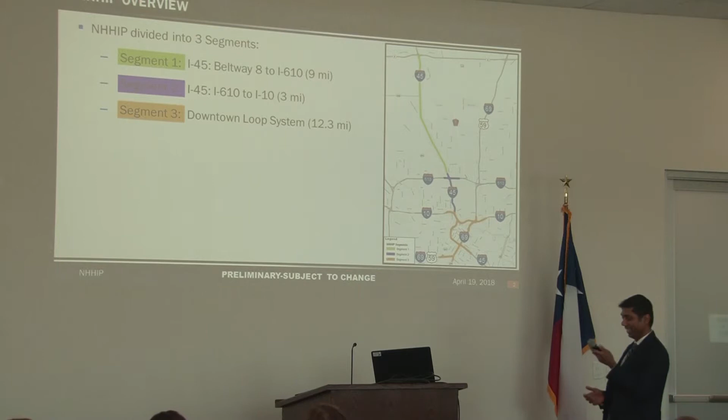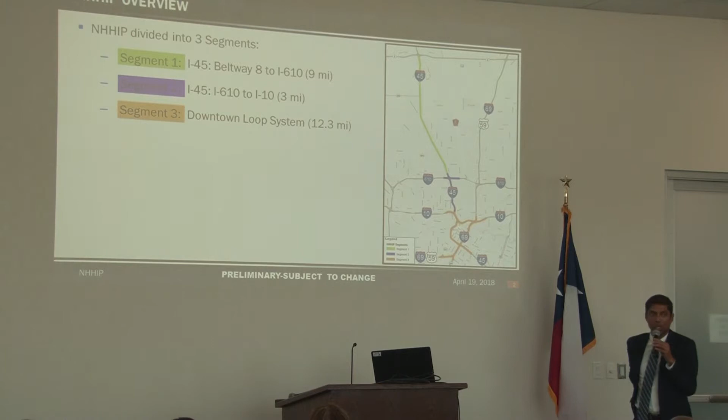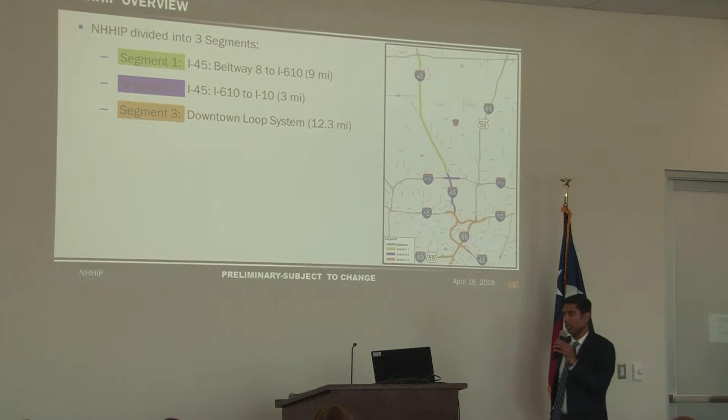So NHHIP has 3 segments. We're going to start up north and head south. Segment 1 is along 45 from Beltway 8 to 610, roughly 9 miles. Segment 2 is from 610 south to I-10, approximately 3 miles. Segment 3, we're calling the downtown loop system, which includes 45, I-10, 69, and where 288 terminates coming up from Pearland, just south of downtown, Midtown area.

The goal of this initiative is to provide a safer facility with additional capacity for projected demand by incorporating transit opportunities, travel demand strategies, and flexible operations. One proposed recommended alternative per segment equals a corridor end-to-end with approximately 24 miles. You can see the map with the different segments color-coded, segments 1, 2, and 3.

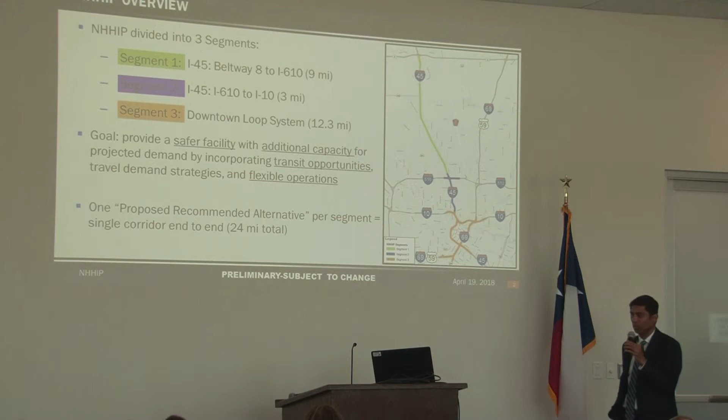The need for the project is due to population and employment increases, to manage projected traffic growth, bring the facility up to current and safety design standards, and move traffic efficiently, including evacuation events.

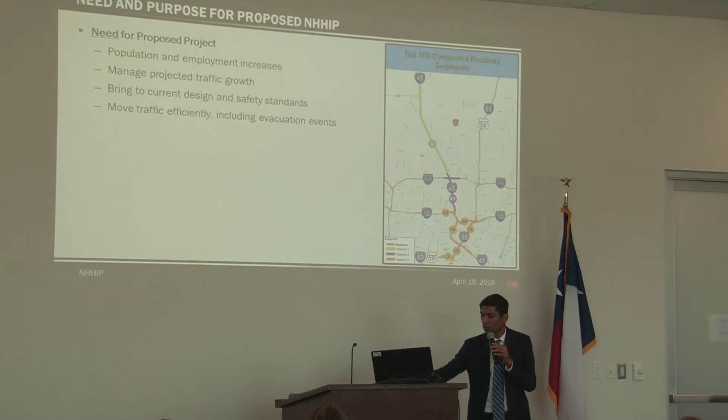The purpose of the project is to manage congestion, enhance safety, provide expanded transit and carpool opportunities with a 2-way 24-hour operation. Today you have a reversible facility for parts of 45 that we want to go concurrent with the proposed project. And finally, improve mobility and operational efficiencies.

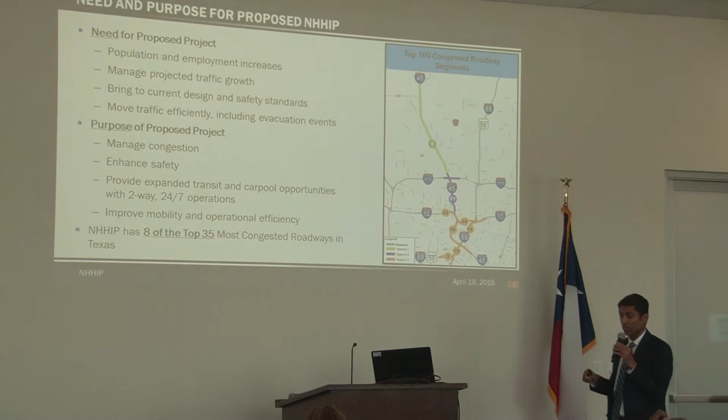I believe it was referenced earlier, maybe in Quincy's slides, that the Texas A&M Transportation Institute every year provides the top 100 most congested roads in Texas. This project, from Beltway 8 down to downtown, the downtown loop system, has 8 segments within the top 35 of that most congested roads in Texas. So definitely, we have a need and a purpose for the proposed improvements.

Today, I want to focus in on segment 3. Classic TxDOT, we start and we're going to deliver 3 before 1 before 2. So bear with us. Segment 3, as mentioned earlier, is approximately 12 miles.

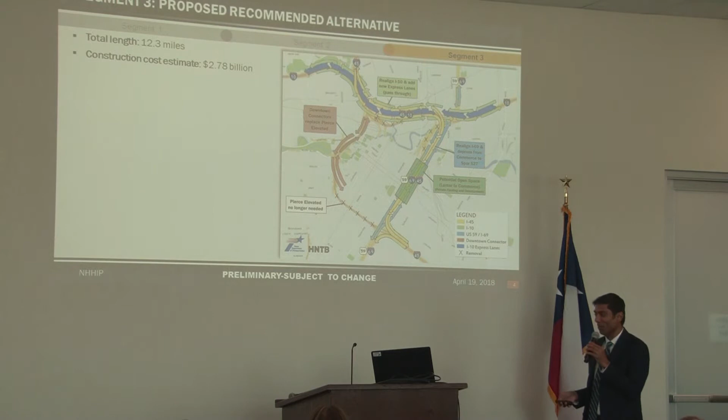The construction cost estimate only does not include design or any engineering and construction testing, materials testing, but just construction is $2.78 billion. I saw some eyes and eyebrows reach for the ceiling over here. It's a big initiative, and you'll see why.

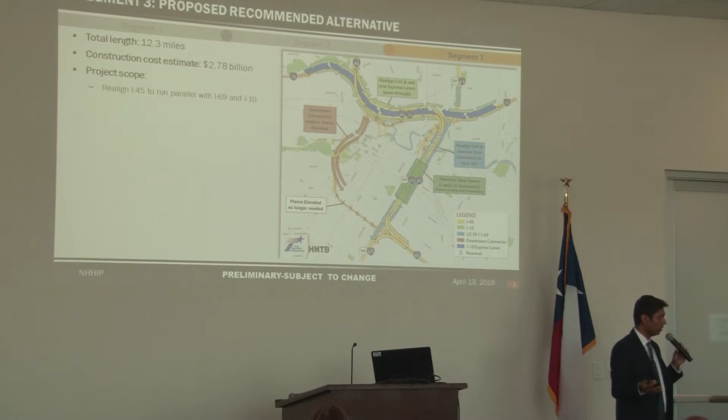The project scope, and this is sort of the big reveal for this project for those not familiar with it: we are proposing to realign I-45, which currently runs on the west side of downtown, partly on the Pierce Elevated before it goes down to Galveston. We're looking to realign it along I-10 on the north end and along the east side of downtown parallel to 69, and then turning again to go in its current alignment down to Galveston.

We're going to decommission the Pierce Elevated and construct downtown connectors that provide a connection between I-10 and I-45 to maintain that connection into downtown on the west side.

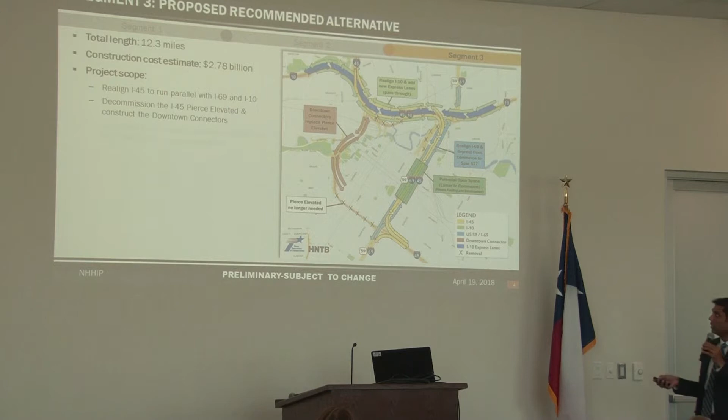We're going to reconstruct I-10 and add new non-toll express lanes, that's the blue up top, running left and right through downtown. This is to get throughput through downtown. Limited ability to enter those express lanes and leave them. It's all about throughput.

Another big component of this project is depressing I-69 Southwest Freeway from Spur 527, which is off the page, to Commerce Street, just below, before Buffalo Bayou. Reconstruct 288 from I-69 and I-45. Essentially, that is where 288 is parallel with 59 today through Midtown.

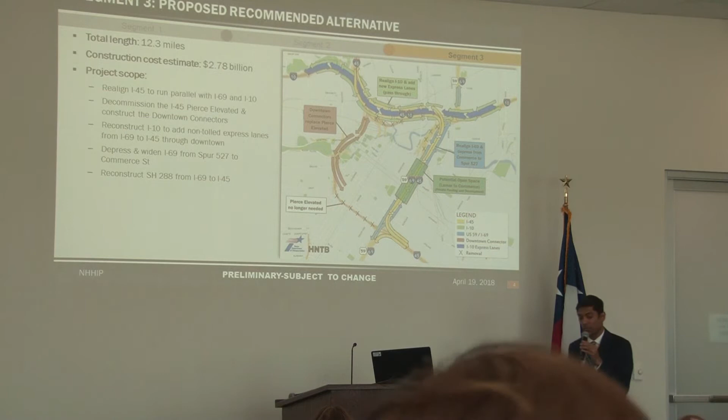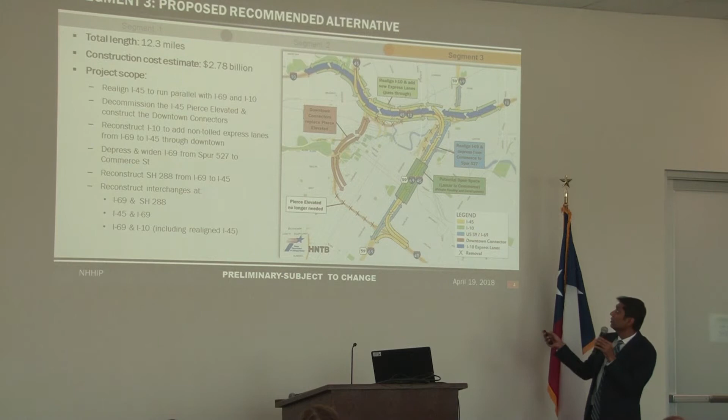With all this work, as you can see, it involves reconstructing major interchanges: I-69 and 288, 45 and 69, right here, I-10, 69 and 10. Now with the realignment of 45, you have to accommodate 45 through that interchange, right? And finally, I-45 and I-10.

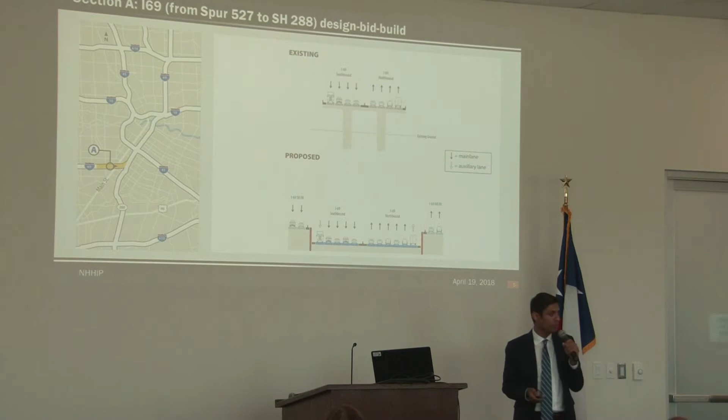So you saw the plan view, kind of the map of the project. I want to show you some typical sections for each of these sub-areas within the project. This section, Section A, is from Spur 527 to 288. You see up there design, bid, build. So that is going to be designed in-house by TxDOT engineers and put out to let for a low bid.

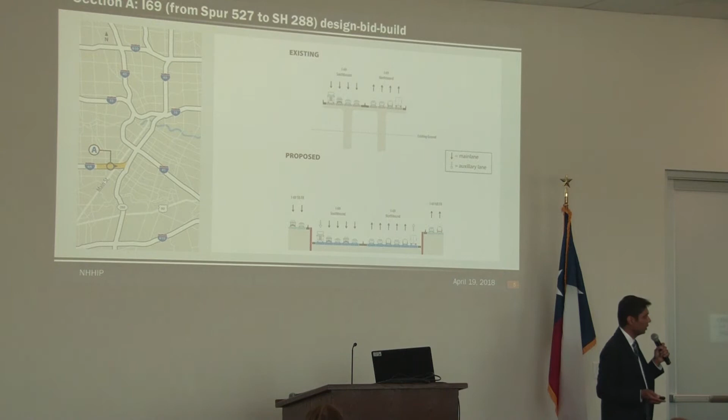So this is quiz time. Is that considered alternative delivery or traditional delivery? All right, good job. This project is projected to let to construction in FY 2020 by TxDOT.

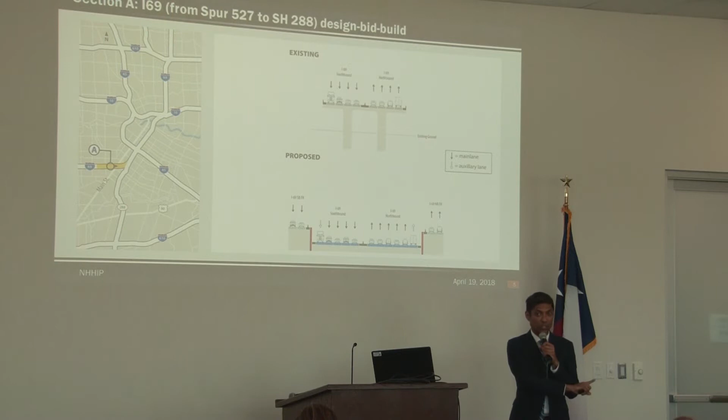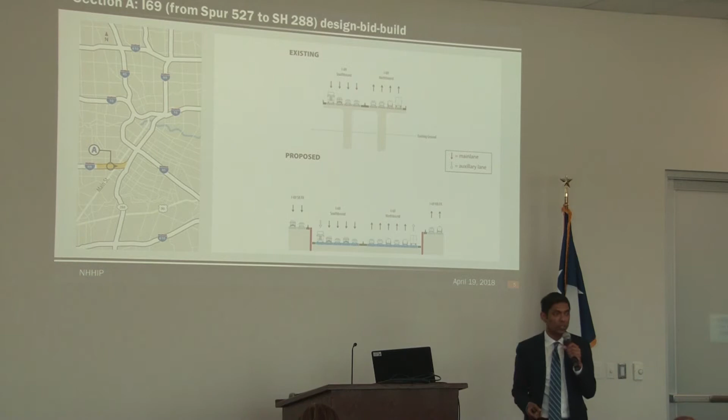Today, 69 is elevated on structures. You've come under the arch bridges through Montrose, and now you're up on structures in this section after 527. With the proposed improvement, we're going to lower 69 to match what's to the west with the arch bridges. 69 will be depressed, we're adding capacity, and introducing auxiliary lanes to allow local traffic entering and leaving the freeway to reduce side merges. We like a laminar flow, not turbulent flow, so the auxiliary lanes allow us to do that. We're also introducing a frontage road system that doesn't exist today for local circulation.

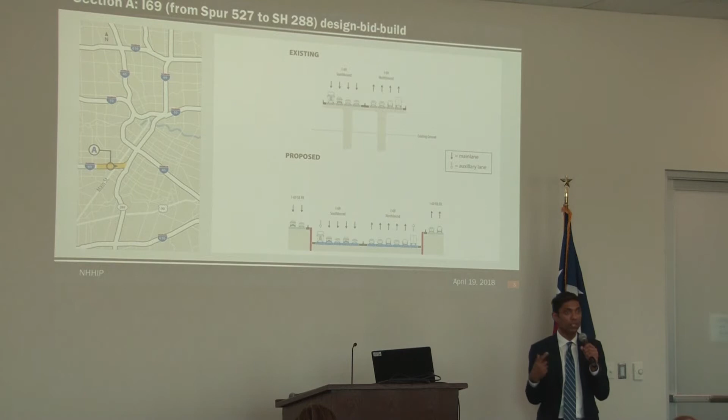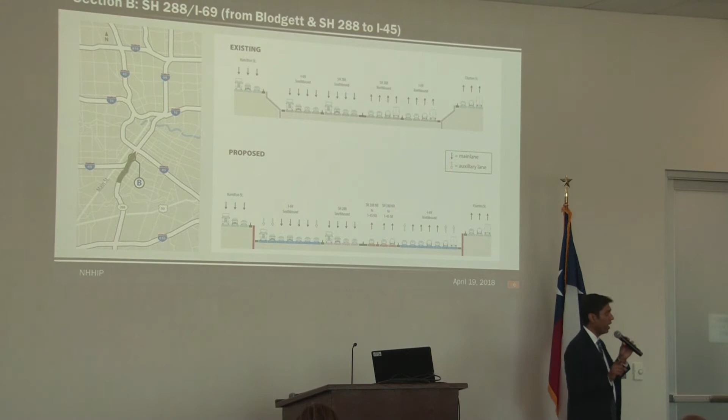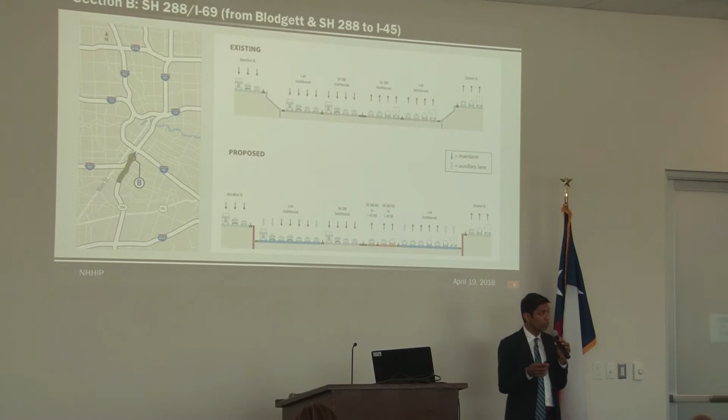Section B. Today, 69 and 288 are parallel with each other. In the proposed project, they will continue to be parallel. However, we make the decision point for folks coming up from 288 earlier than today, whether they want to go to 45 north or south, or to 69. Once you make your decision, it's barrier separated.

Section C, I-69. This is essentially behind the convention center, Minute Maid Park, and the soccer stadium. Today 69 is up on structure. If you're going south on 69, you can see the convention center really close, you can almost touch it. With the proposed project, we're looking to depress I-69. This is also the first time you'll see I-45 in its new alignment, in the middle of 69. We're going below grade, and the local cross streets that currently go under the 69 bridges will actually be open, at grade, above ground, while the highway is below.

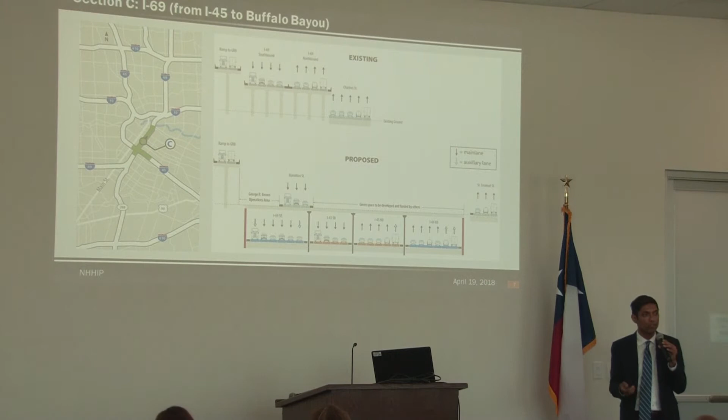We've got an animation that I'll show you, and I want to touch on a feature you'll see. With depressing the highway, you've got an opportunity now with a deck for a third party to fund a deck park. We're having those conversations right now with the city and other folks downtown who are interested in partnering with TxDOT for that work.

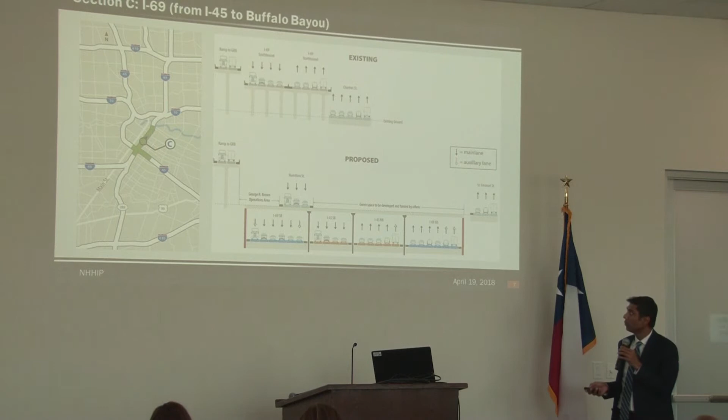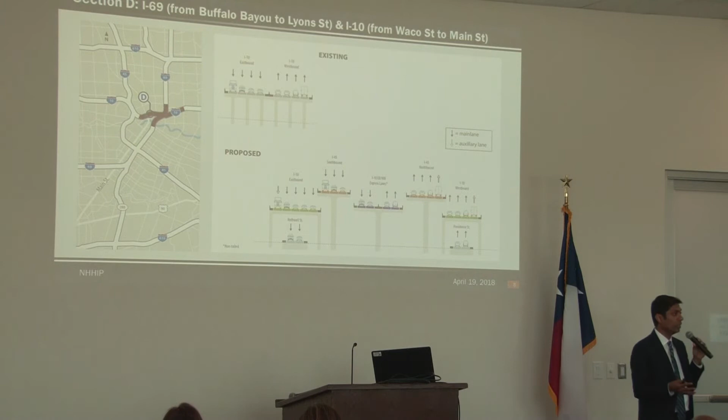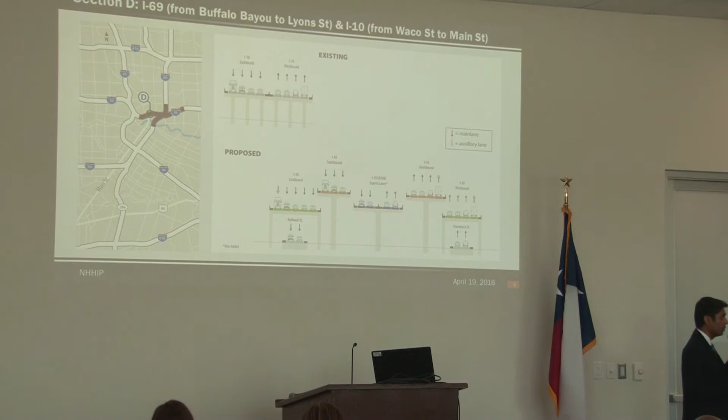Section D is essentially along I-10. Once again, you see I-10, and I-45 now has been realigned to be parallel with I-10. You also see the new feature of the I-10 non-tolled express lanes. The regular I-10 lanes, in green, allow interaction with local streets via entrance and exit ramps, but the express lanes of I-10 are more about throughput, getting folks through downtown with minimal entrances and exits. And of course, you see the I-45 structure.

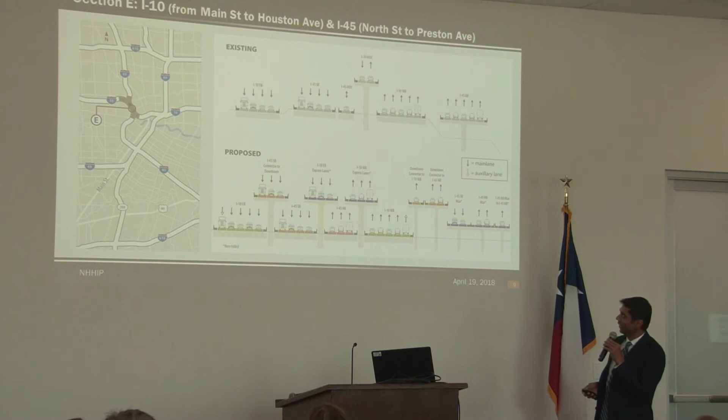Section E. It's a lot of work there, so just take your time, we'll work left to right. Why don't we understand where we are today? Today we've got I-10 and I-45 coexisting with the I-10 HOV.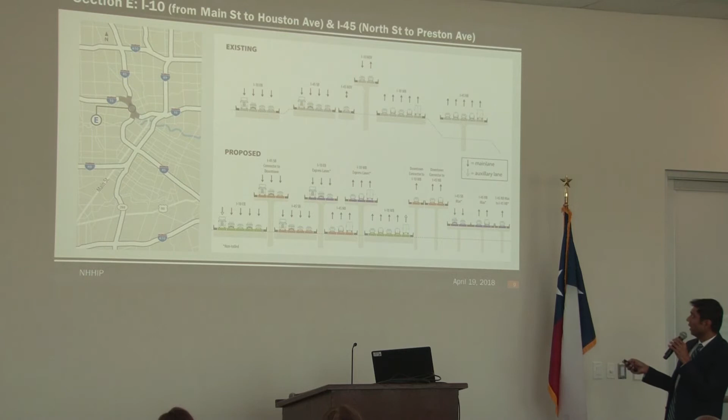Tomorrow you will continue to have I-10 regular lanes, general purpose lanes, and you'll have the express lanes. You have I-45. Because we're realigning 45 and decommissioning 45 on the west side of town, we still want to provide connectivity on the west side of downtown, and that's what these downtown connectors provide, accessing both downtown via I-10 and I-45.

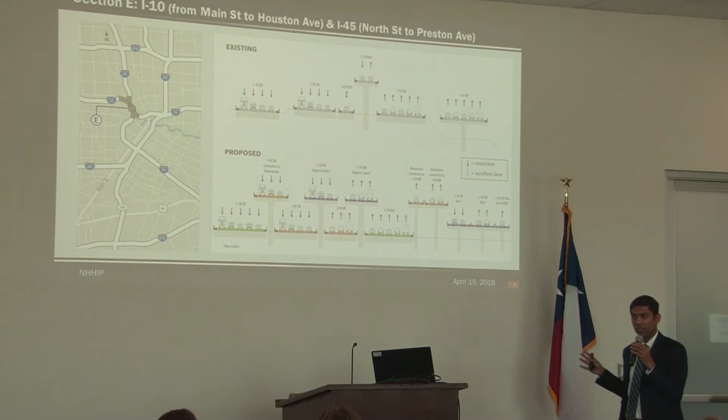This is a new element to the slides, the I-45 max lanes, non-tolled. The distinction between the max lanes of I-45 and the I-10 express lanes is that the I-10 express lanes will not have an occupancy criteria like HOV, anyone, single or multiple occupancy, can get in those lanes, whereas 45 max lanes will have that restriction. You may have to have at least 2 people in the car to use those lanes. Transit will be able to use those lanes. So it's a little more restrictive, and we're calling it max lanes.

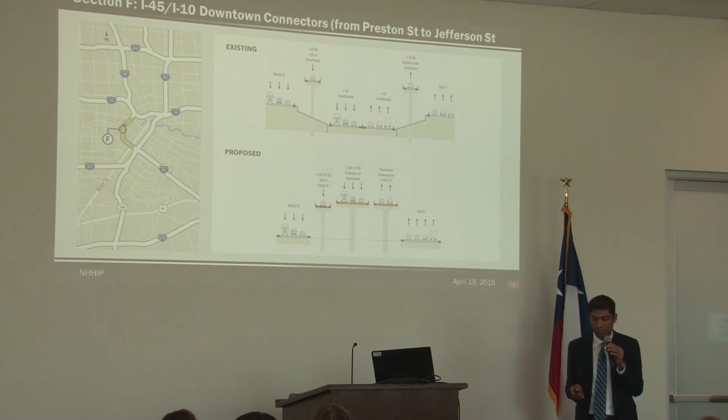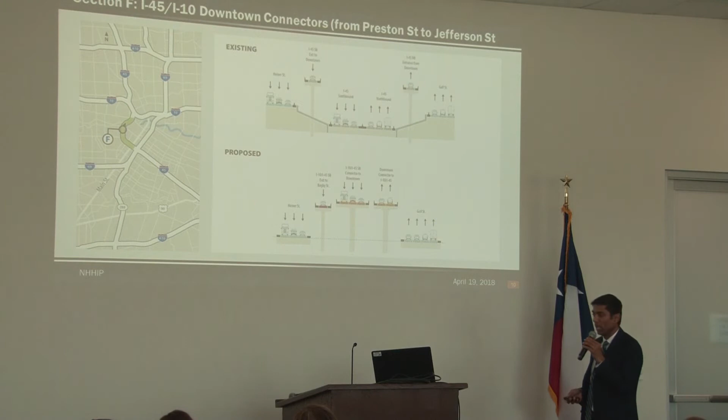The final section I'll share with you is the downtown connectors. Today you've got 45 on the west side of downtown, also carried on the Pierce Elevated. As we talked about earlier, 45 is going to be realigned, and what's left with the proposed project is the downtown connectors, picking up local traffic in and out of downtown and getting them to I-10 and I-45.

The next slide, I believe, is the animation. Is there any questions right now before we get into that?

Question about the private design build where there's a tollway afterwards. When are these tolls going to be released to TxDOT? I mean, when is it going to be released to TxDOT so that the public doesn't get stuck with the ever tollway? TxDOT needs some relief to get some of that money back.

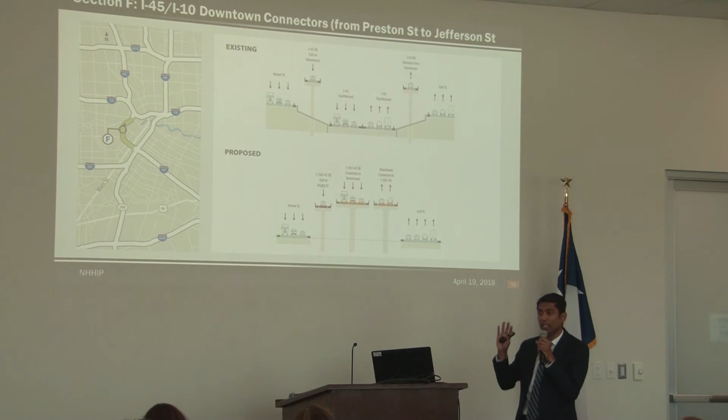So this project does not have a toll element, I want to be very clear about that. The I-10 express lanes are non-tolled, the I-45 max lanes are non-tolled. The 288 project is being constructed right now in Harris County. It's a version of design build called concession, a long-term agreement that TxDOT is entering into with our developer, the concessionaire. I talked about it earlier. The cost of construction and design is $815 million. TxDOT is only putting in 17 of that. The private developer has brought their own equity, secured their own loan with the federal government through a TIFIA loan, and they've already sold their own bonds. TxDOT has no risk with that debt.

If, when they open that facility, toll collections reach a certain level, our contract with them has provisions that they provide a share of those revenues. To answer your question, that agreement per law cannot last more than 52 years. So the facility at that point would turn back to TxDOT.

Is the connector road to downtown going to be built first, in terms of traffic control? That's a very good question. As you can see, for the downtown segment 3 work, traffic control is going to be a big part of the design build effort, and the teams we procure or advertise to will have to speak to that with their concepts and plans for keeping traffic flowing.

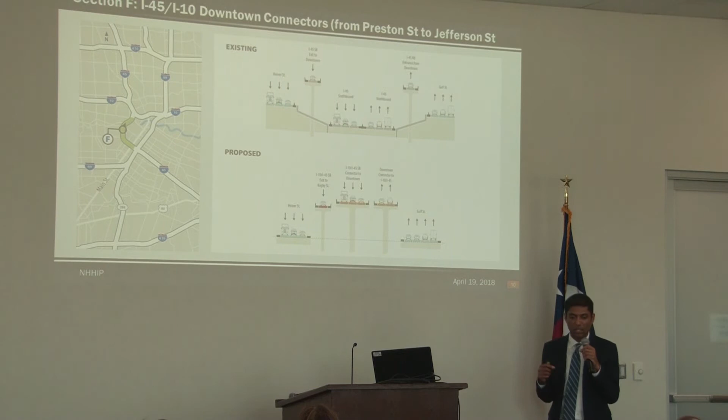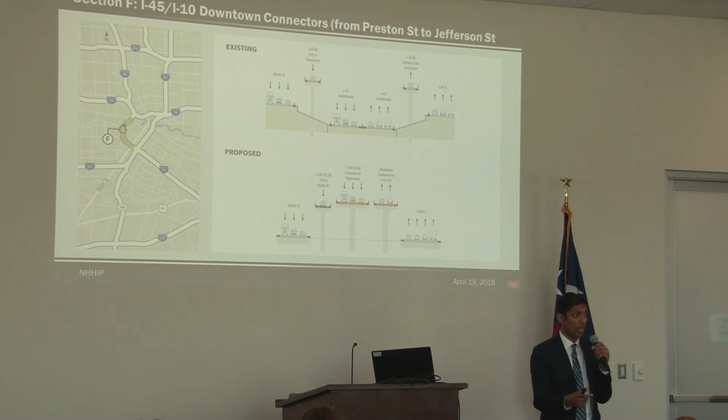At this point we have not come up with a sequence of construction, and that's why we're using design build. Unlike a traditional project where we design the sequence for the contractor, we want to see those ideas, taking advantage of the contractor teaming up with their designer. We'll have prescriptions that we need X number of lanes on I-69, I-10, and 45 to remain open and flowing, but how they phase it, we want industry to come up with those ideas.

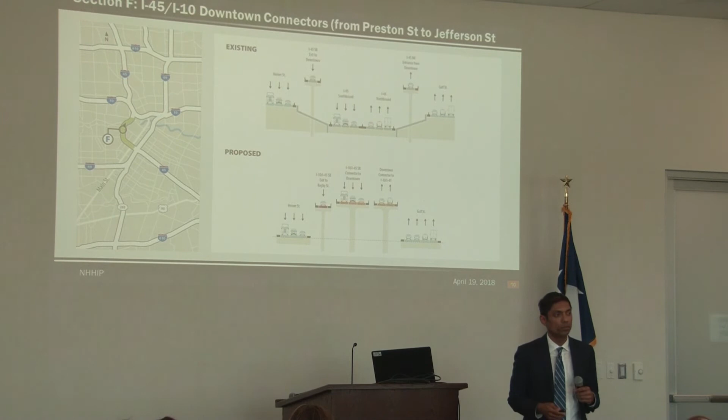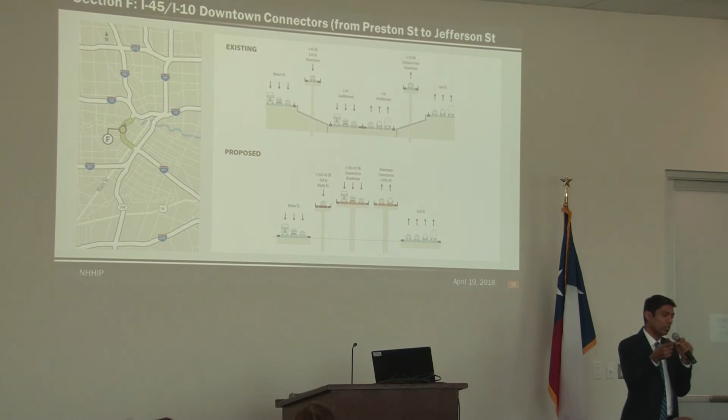I see that the proposed alignment, most of the sections are depressed. Are they going to be above the 100-year floodplain? We are currently, and it's in a future slide, designing the interstate system to a 100-year standard. We're engaged with advancing the preliminary design supporting the environmental schematic to the next level to help us write the specs for the design build procurement.

Where we can do better than 100-year, we're committed to doing that, just because it's Houston and we're coming off of Harvey. Aside from lowering the freeway, drainage is a high-risk item in this region, and since we're lowering the freeway, we're paying particular close attention to that element. That's why we've engaged our providers to help tighten the specs before we go out to the design build community.

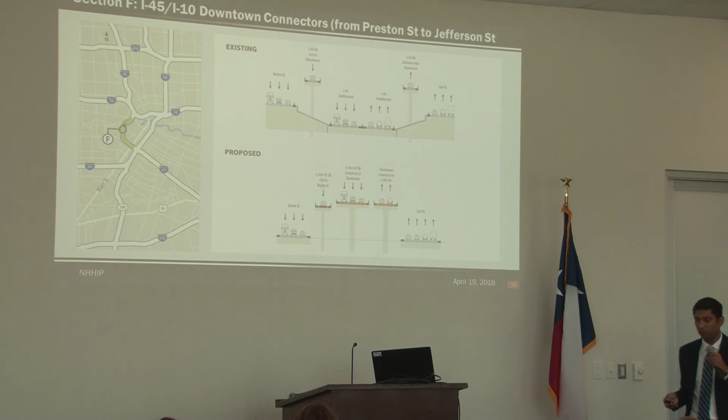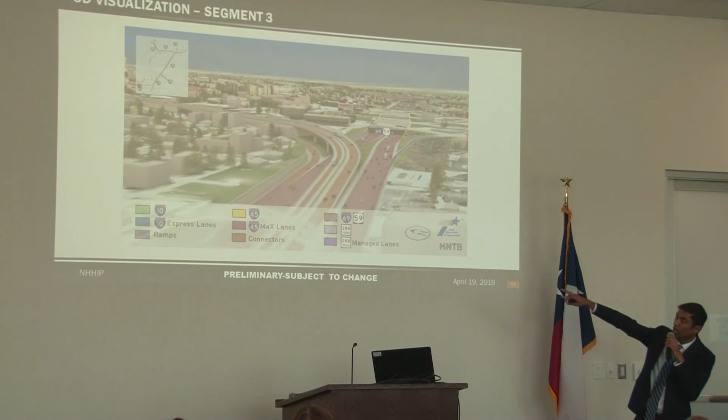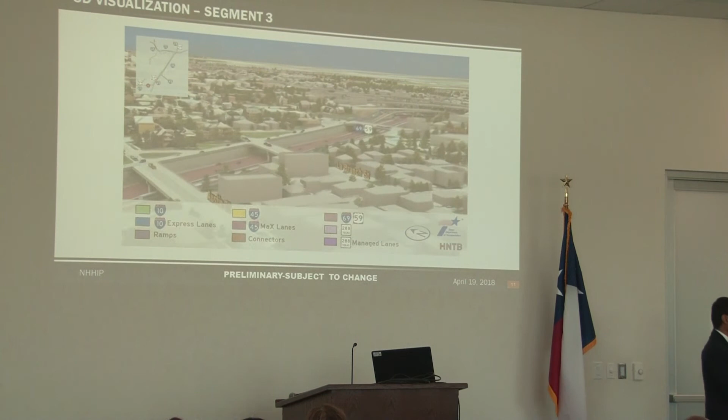All right, so let's do the animation, focused on segment 3. We'll start with the end of the project, 69 from Spur 527 going off to the left. This is where 69 is depressing now, currently on structure. This is another opportunity for a third party to partner with TxDOT to fund and construct a deck park. As Quincy is fond of saying, partnership means come to us with some dollars, so I want to make sure I share that message.

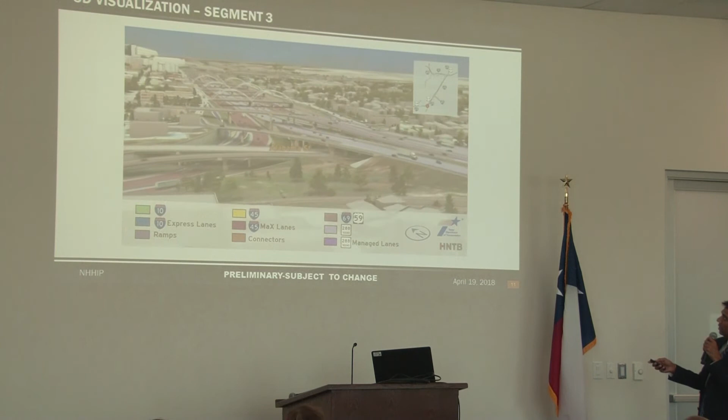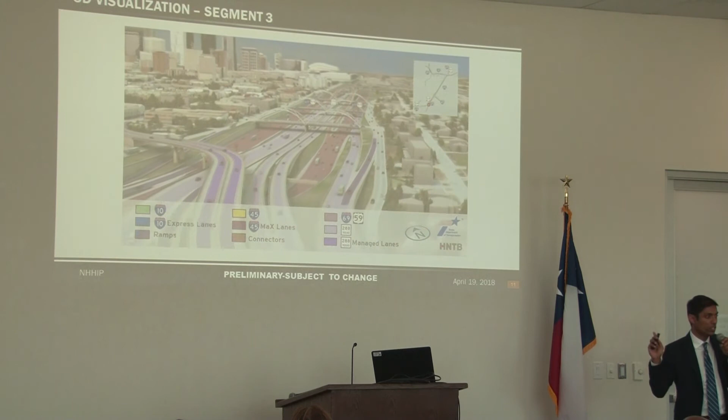Now we are turning to where 288 and 69 are side by side, and we are looking to carry the theme of the arch bridges in this section. Elgin, McGowen, and Tuam are the three bridges you see we'll be rebuilding. And we're going to approach I-45 as it goes to the right to Galveston.

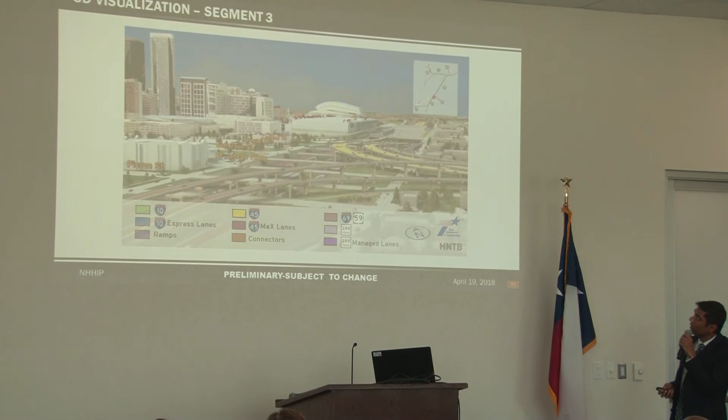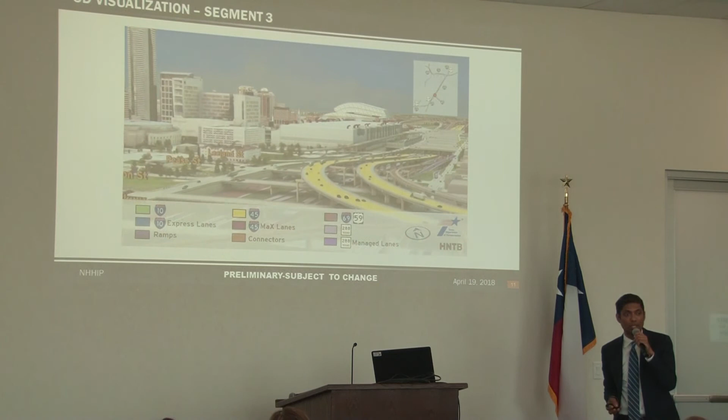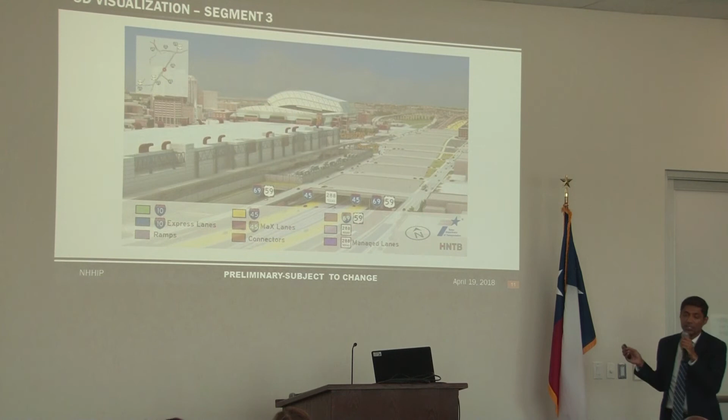45 now is coming up and turning to the east to go north, parallel to 69, and it will be depressed. The convention center is to your left. 45, 69 is diving down, and this is another deck park opportunity, again a partnership with a third party.

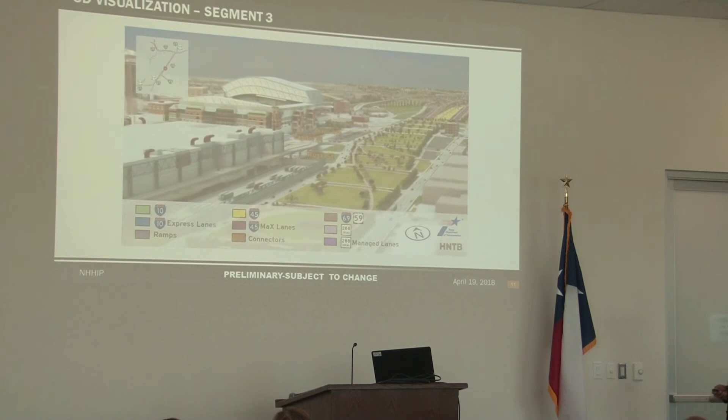We've got Minute Maid, Go Stros, is that right? Got the team right? Not the Rangers, it's the Stros.

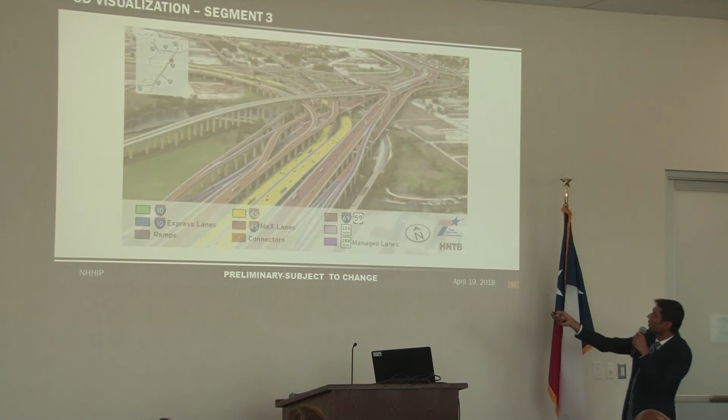All right, so we're out of the depressed section, we're climbing again. We're coming up on Buffalo Bayou, right here. 69 is going to go up to Humble, and now 45 is turning to be parallel with I-10.

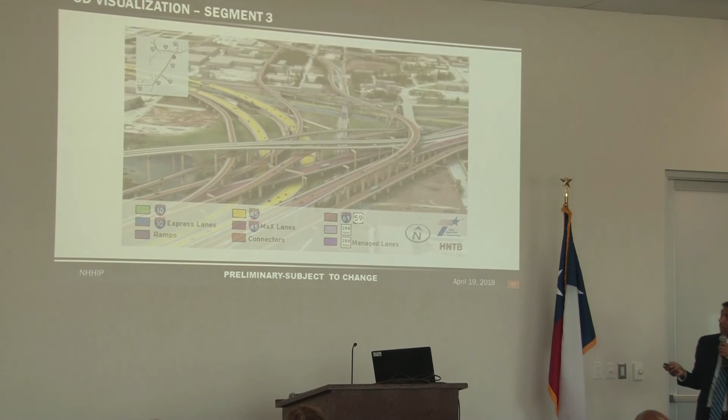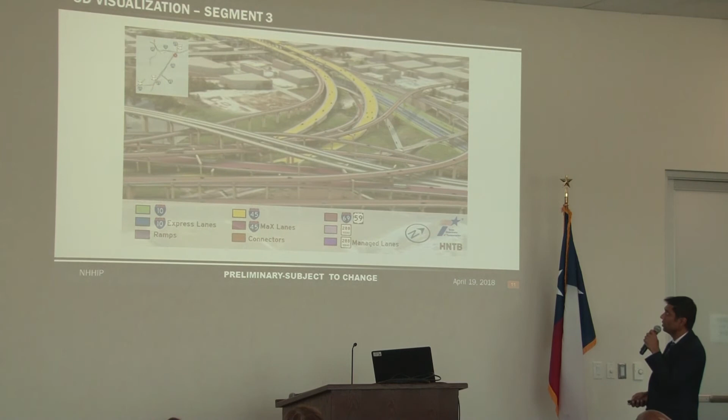I-10, we're going to pick up I-10. The green is the general purpose lanes of I-10, with your entrances and exits as normal with local cross streets. The blue there is the express lanes of I-10, limited access with in and out of those facilities.

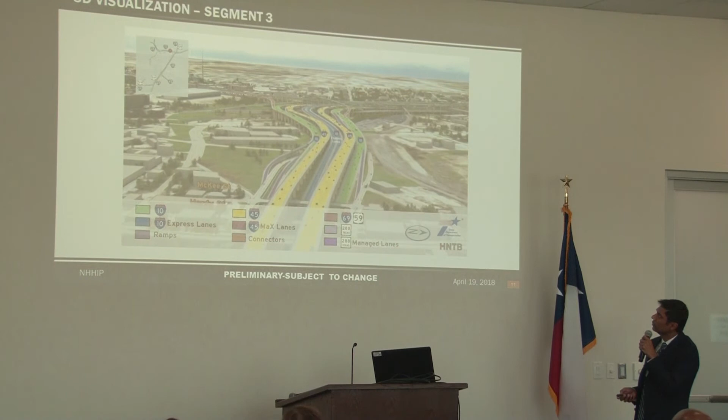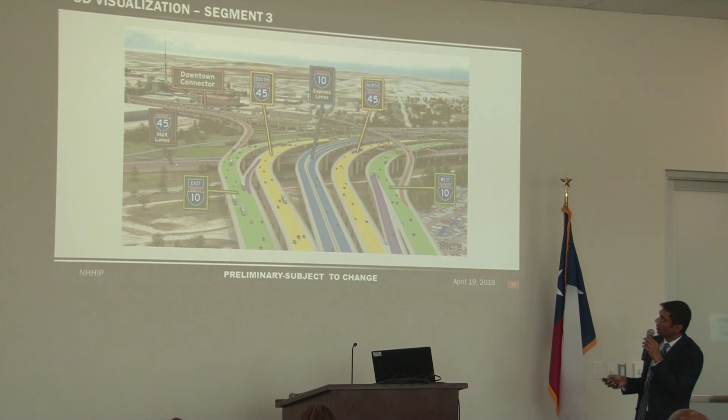Start to see here the downtown connectors entering and leaving downtown. We've got the managed lanes coming in. And now 45 is turning to go north to Dallas. Not sure why anybody would do that.

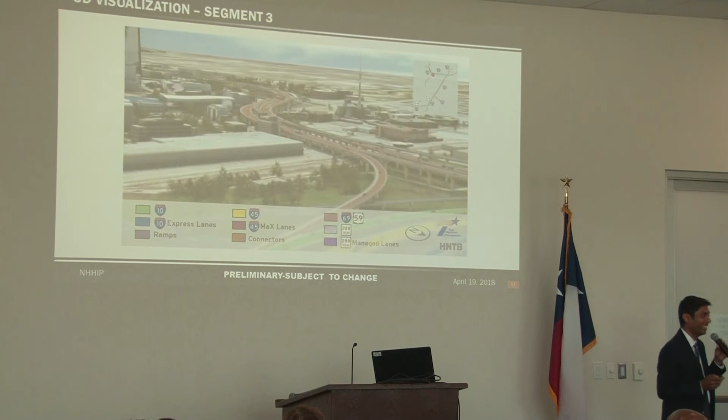And now we're going to go into greater detail with the downtown connectors. So by now you are here because you've come off of I-10 or I-45 and you want to go into downtown, or you're leaving downtown to access I-10 or 45.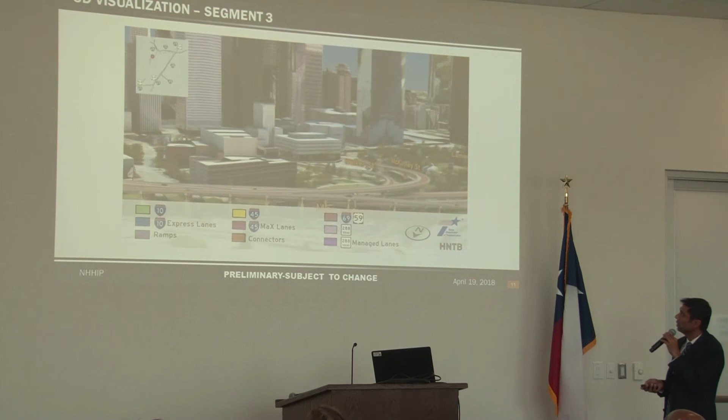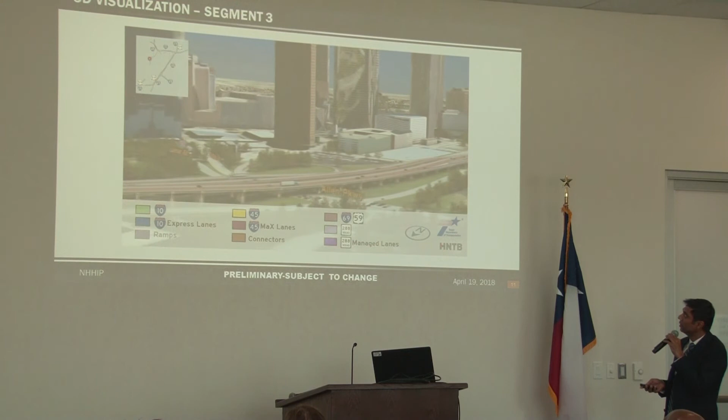Going to terminate here. You can pick up and go north on Pease, or southbound you can terminate into downtown via Jefferson.

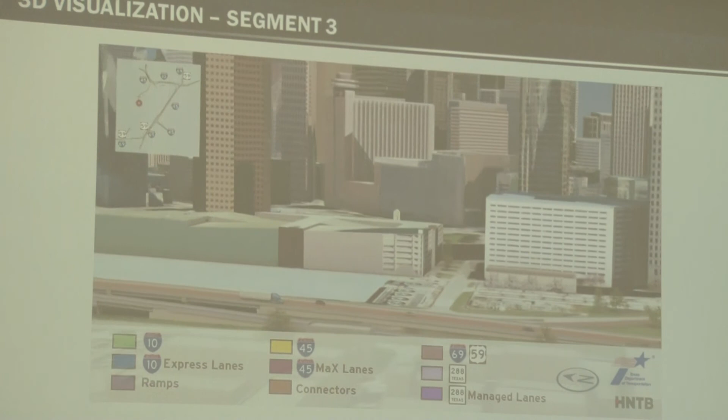So then the next question is, what are we going to do with the Pierce Elevated? Because we no longer have a purpose for it from a highway perspective.

This is an artist rendition of one option. There are many options, and we're currently discussing with the city their thoughts on how they want to repurpose the Pierce Elevated structure. It can remain, perhaps function as a linear park, or be demolished and the land redeveloped in a mixed-use fashion. We're working closely with the city to understand their desires as it impacts the Pierce Elevated.

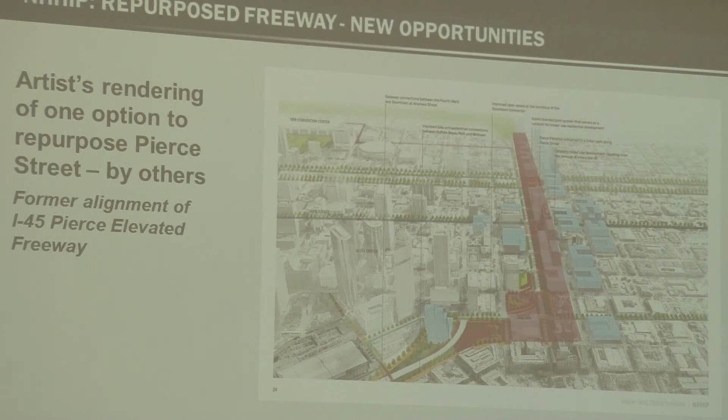So a quick overview of where we're at and where we're going. Right now in design, the schematic is publicly available on the website. There's a lot of information on that website, including the draft environmental document.

We completed the draft environmental impact statement, published in the spring of 2017, a year ago, and then we held three hearings in the summer, in May. The final EIS, environmental impact statement, is currently being wrapped up, with a record of decision anticipated at the end of this year.

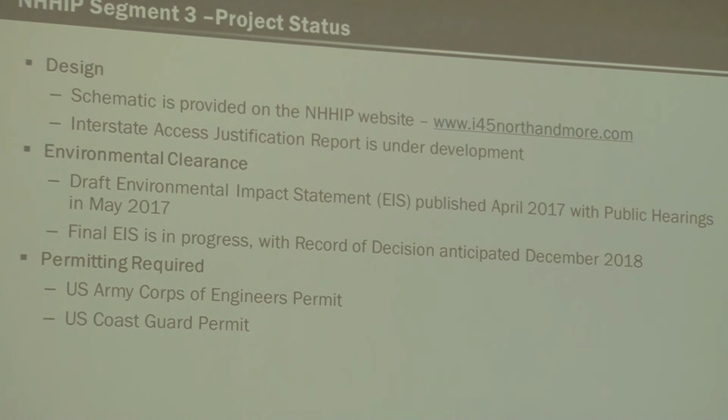We know we will need U.S. Army Corps of Engineer permits and U.S. Coast Guard permits for this project, and we're starting to look and do that early work.

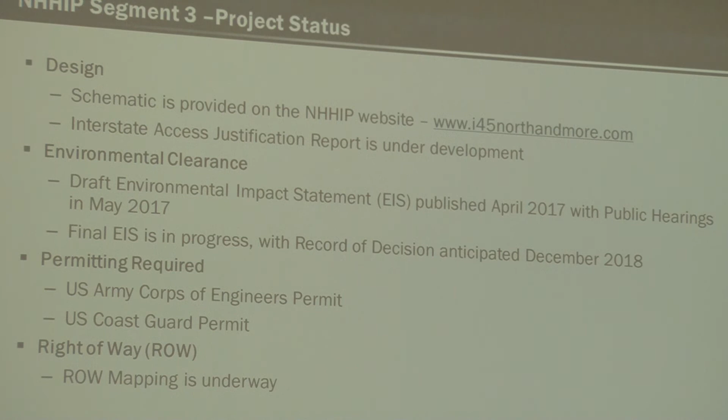Right-of-way mapping is underway. Railroad agreements—there are 12 rail crossings, a combination of Union Pacific and Metro facilities. We've started those conversations with UP and Metro. We currently have providers performing aerial and underground investigations for utilities, and geotechnical investigations are currently underway.

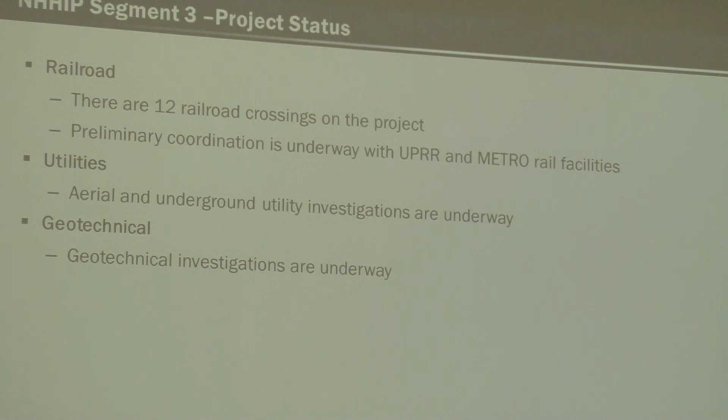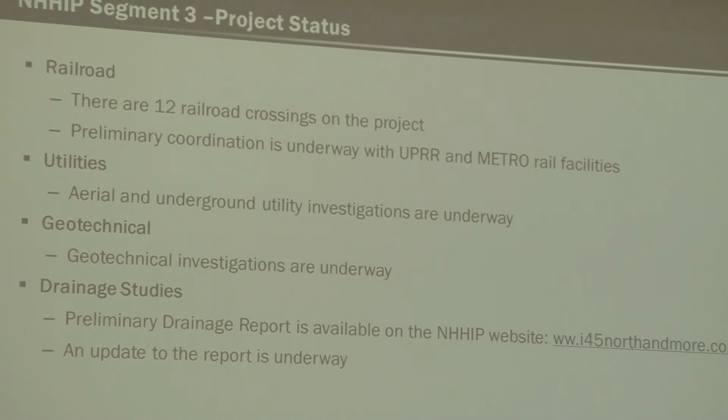Regarding the question earlier about drainage, because of the risk profile of this particular discipline, we're engaging providers to help us advance the completed preliminary drainage report, to help us write the technical specifications for the design build.

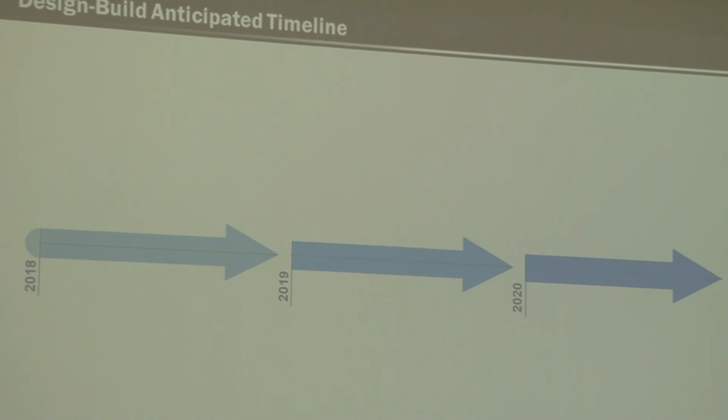Here's a high overview of how we anticipate the design build procurement progressing for segment 3. This spring, we intend to do industry outreach, including this event. We've got a series of events in May and June in advance of issuing the request for qualifications. Earlier I talked about this being the first step in a two-step process.

This is where we ask industry, when they submit their statement of quals, to essentially tell us three things: their experience, both as a firm and their individuals—are they qualified to do this type of work? Do they understand segment 3 and the challenges and complexity of the project? And third, what is their safety record?

That will be in the statement of quals to be submitted in the fall of 2018. We will evaluate and score those statements of quals and propose a short list of teams.

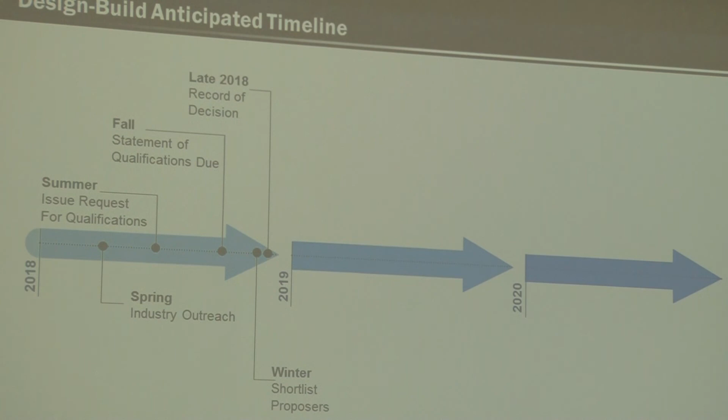The record of decision is expected at the end of this year, concluding the environmental clearance process. We would like to have that in hand before we go out and issue the final RFP. It gives us certainty of the commitments we need to provide coming out of the environmental process, and it also gives our industry partners—contractors as well as their designers on the design build side—certainty that we have environmental clearance.

Six months later, we will receive proposals—both their price and their technical approach to the job. In the fall, we will evaluate and recommend a best value team for a conditional award, with final contract execution anticipated at the end of 2019.

So we have a provider under contract, with early design starting in the spring of 2020. You'll ask, well, why the gap? Why not get to work? The gap between contract execution and start of design is used for the design builder to submit two main documents: their project management plan and their schedule.

The project management plan has many chapters, and this is how they are going to hold themselves and operate during design and construction. What processes are they going to follow in design? They will likely lean on their lead designer to write that chapter. What processes are they going to follow in construction, from traffic control to testing, materials testing, and placement of materials? They'll lean on their testing firm to write that chapter.

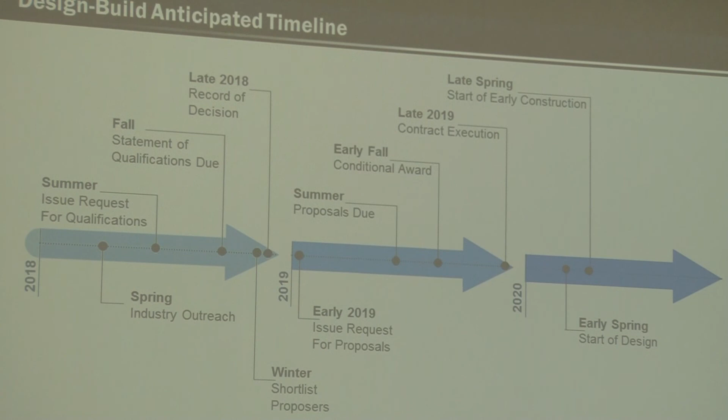Are there any questions about 45? That's sort of a loaded question, isn't it? So many questions, but—all right, thank you.